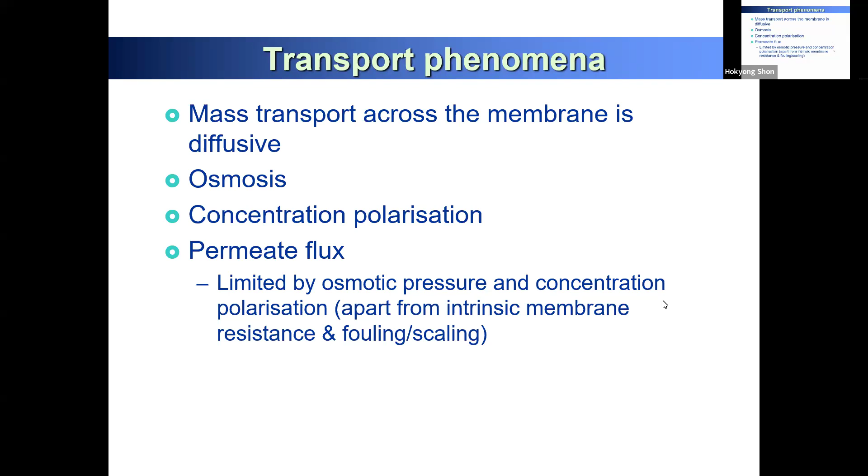Okay, so now it's time to talk a little bit more about osmosis, concentration polarization, and permeate flux, to design our process well. So, osmotic pressure - reverse osmosis, forward osmosis - I already explained the detail.

So we have several examples of osmosis in our body, even in fruits, like a cherry. When you have a very big cherry and you don't pick this fruit, and then it rains, the rainwater will be absorbed by the membrane of your cherry. The water keeps being absorbed, and the cherry will be damaged. That's one example of an osmotic membrane, even in the skin of your fruit. It's like you have this kind of osmotic pressure - this is the cherry membrane.

Even with a coconut - the coconut is a big fruit inside. Water keeps accumulating, passing through into the water inside the coconut, and you have a different taste, a little bit sweet, continuously. So water even accumulates from inside to outside through the membrane.

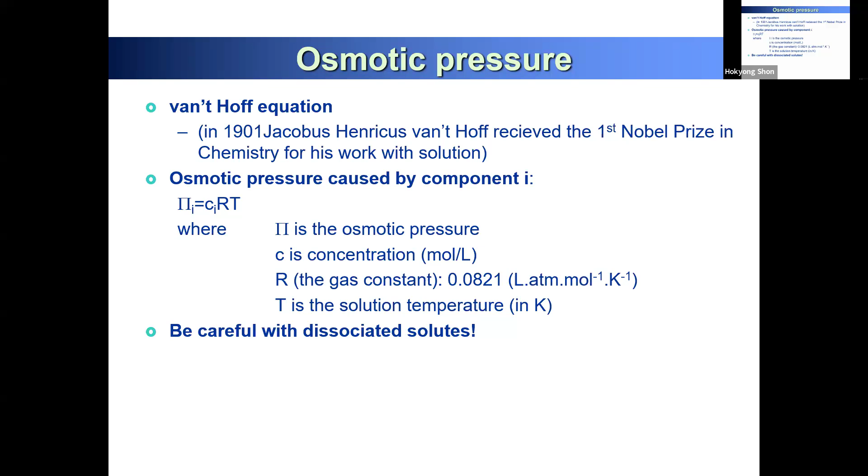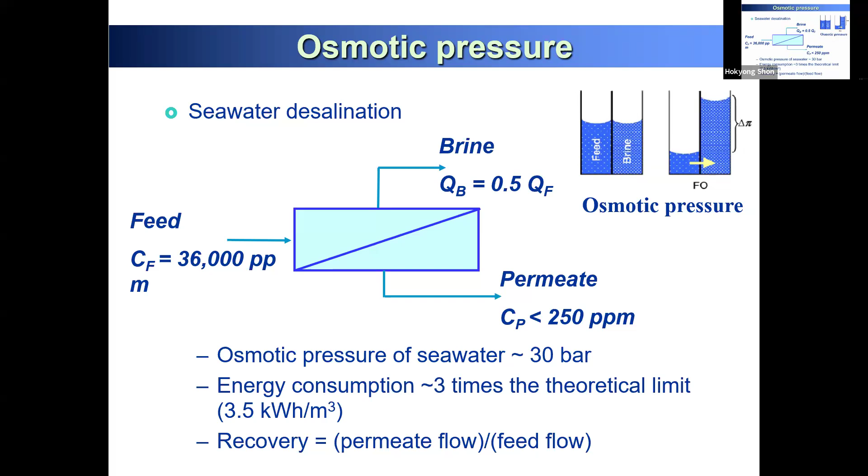Concentration polarization is another important concept. What happens is the water is flowing, then concentration continuously increases on the feed water side, because the water is being desalinated.

Concentration continuously accumulates, and you have more polarization impact due to high pressure. You get a higher concentration on the membrane surface rather than in the bulk channel flow. So your concentration on the membrane surface differs from the concentration in the channel.

The osmotic pressure changes at the top because you keep pressurizing at 70 bar, and ions keep trying to pass through the membrane as water keeps passing through. So they keep accumulating on the membrane surface. Real osmotic pressure differs between bulk solution, membrane surface, and membrane permeate.

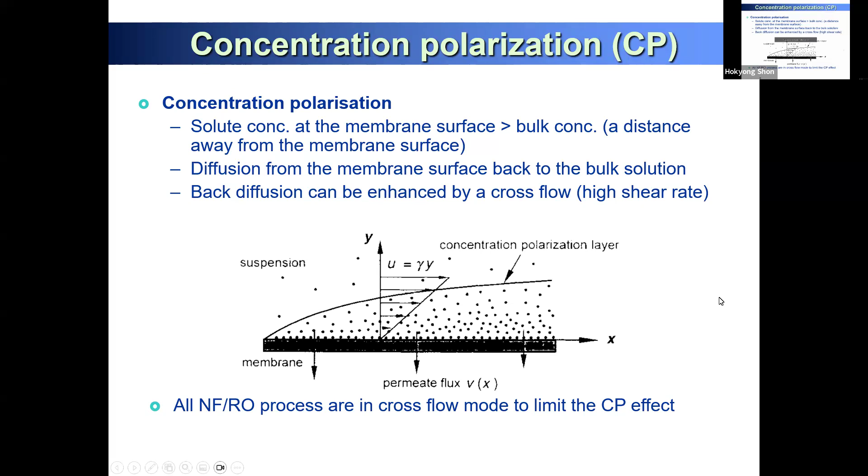So what's the element? You can design the element - this is a 40-40 element. We just say 40-40. 40-40 means 40 inch - 40 inch means 1 meter, this is 1 meter, 40 inch. And 4 inch is 10 centimeters of diameter. So 40-40 means 1 meter, 10 centimeter diameter is the one element you can install.

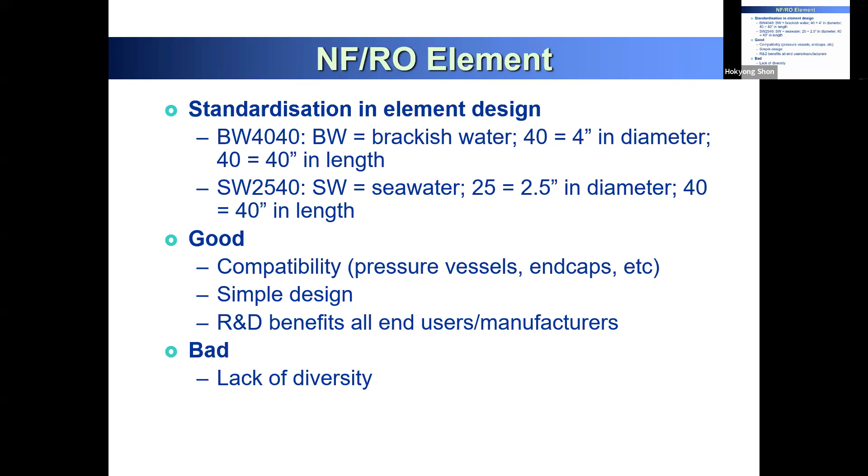Now let's see how this element is manufactured. If you see this manufacturing process, you will have a better idea how we can connect this one as a membrane element.

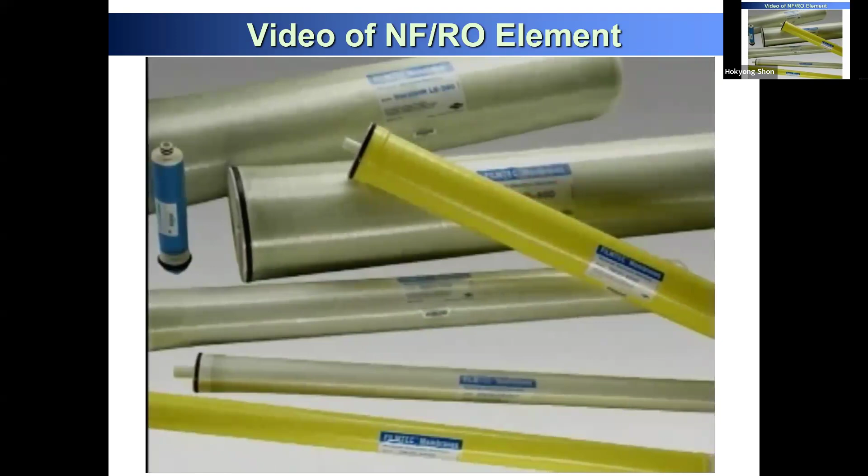FilmTec Corporation, a subsidiary of the Dow Chemical Company, is the world's leading manufacturer of reverse osmosis and nanofiltration membranes. Our products are used in a wide variety of industrial, municipal, residential, and commercial applications, helping Dow achieve its mission of improving what is most important in life - the human element.

Our cutting-edge manufacturing technology improves the performance and quality of our membranes and provides the scale and infrastructure to serve the rapidly growing demand for RO and NF membranes. Providing high-quality membrane products starts with quality raw materials from ISO-certified suppliers.

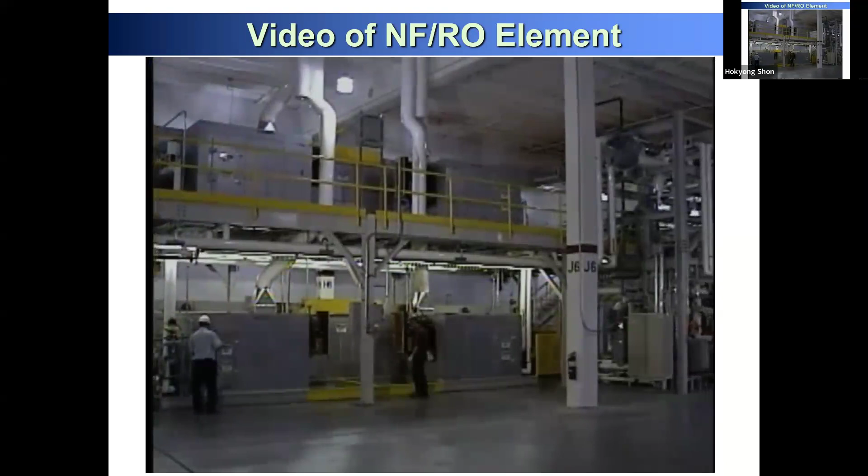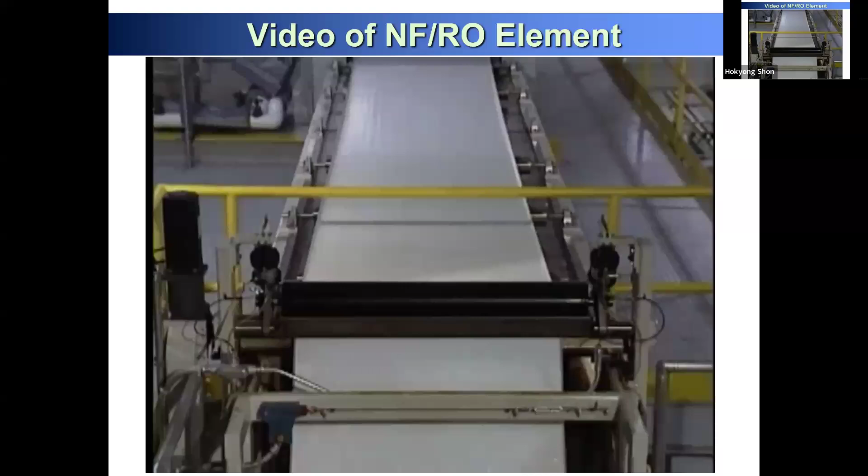FT30 thin-film composite membrane, invented by FilmTec nearly 3 decades ago, is the genesis of today's industry standard. With each new generation of manufacturing equipment, the quality of FilmTec membranes is continuously improved through advanced process automation and control, from handling polyester-based material through casting the microporous polysulfone support to the complex polymerization reaction that creates the polyamide membrane layer. Design innovations allow us to use advanced membrane recipes that improve membrane performance and consistency.

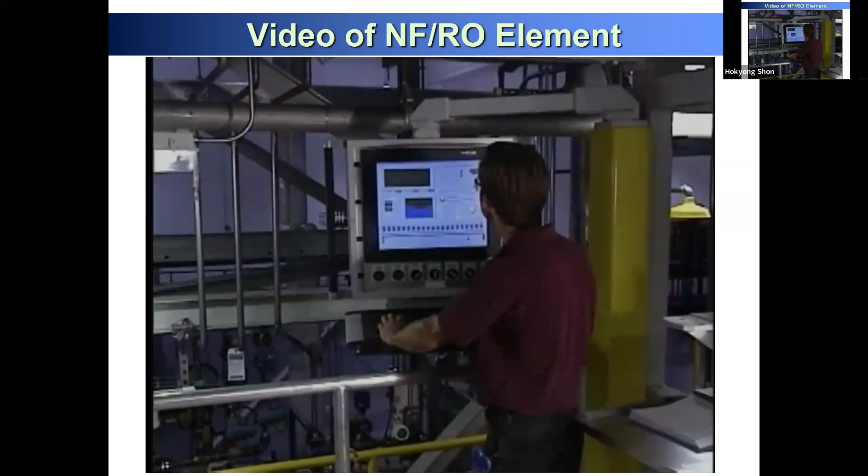Dozens of critical variables are controlled and inline quality checks are performed to produce consistent, defect-free membrane without patching, giving FilmTec membrane the widest pH cleaning range in the industry.

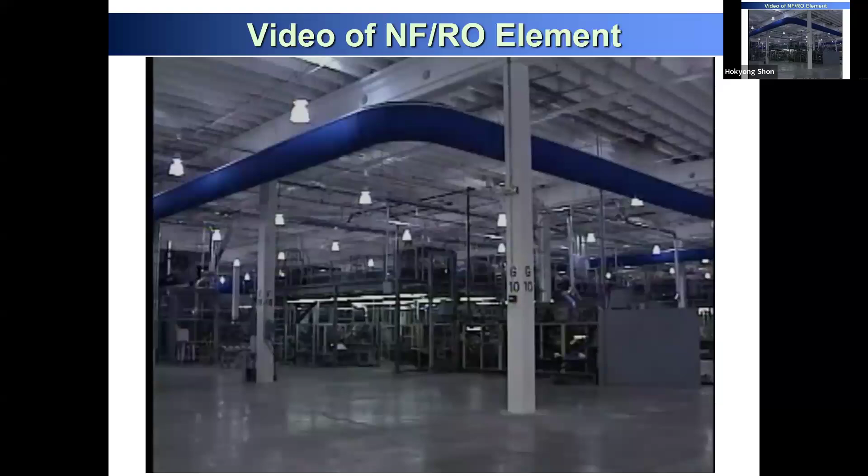A spiral wound membrane element can be fabricated manually or automatically. Dow uses custom-designed precision rolling equipment to automatically fabricate FilmTec elements because it allows for better, more consistent element performance.

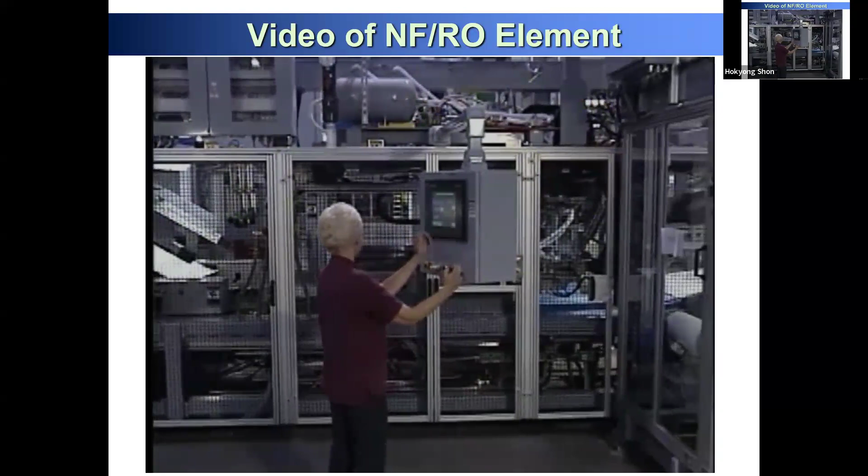Sophisticated robotics for leaf construction and assembly ensure that every element is precisely built without membrane damage that often occurs during manual handling. Automation enables construction of shorter leaves compared to manual rolling, resulting in a more efficient product that is less prone to fouling.

Precise computer-controlled glue lines ensure the highest active area in the industry with guaranteed accuracy and minimize leaks, which can result in poor permeate quality.

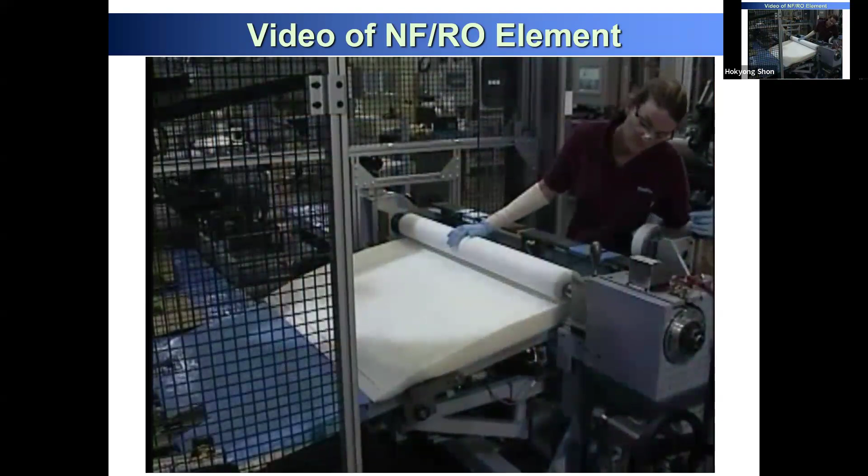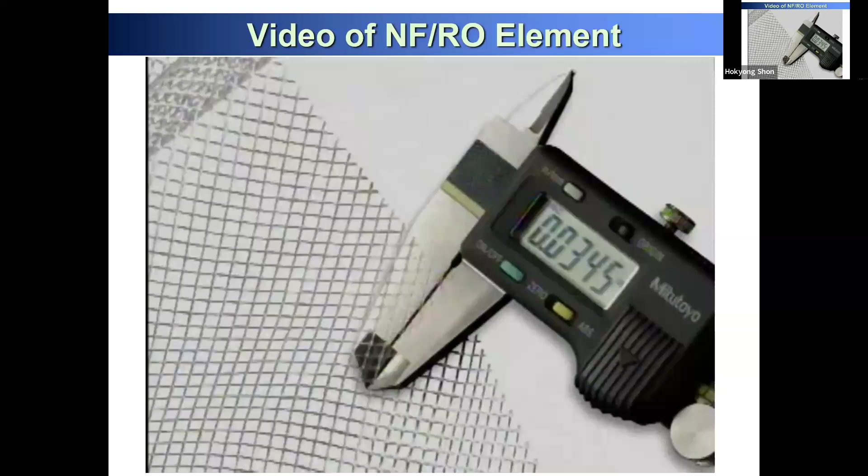FilmTec elements are optimized to have the highest active area combined with the thickest feed spacer in the industry, offering several operating benefits, including improved cleanability, lower pressure drop, increased durability, and the ability to handle more challenging feed waters.

A unique barcode allows continuous tracking of each element. Online quality checks for scroll integrity and dimensions, and an inline vacuum test, are performed on every element to ensure mechanical integrity.

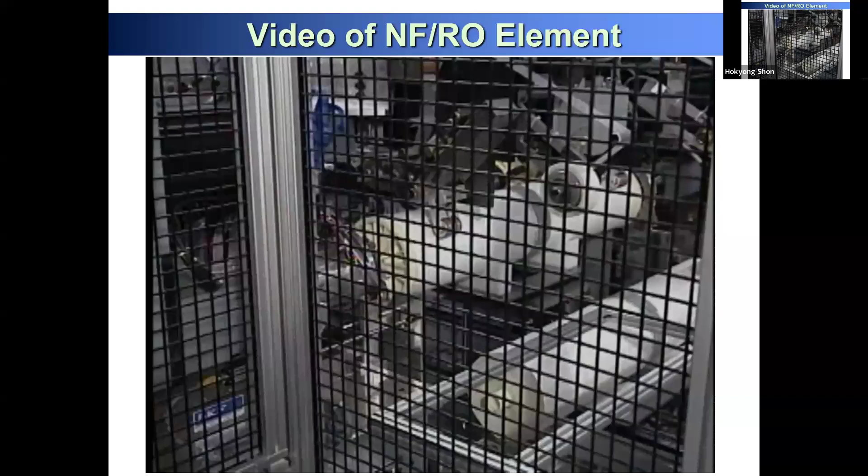Any elements failing preset measurements are discarded. End caps are welded to the product water tube in a process that improves element strength, and a quality test ensures weld integrity.

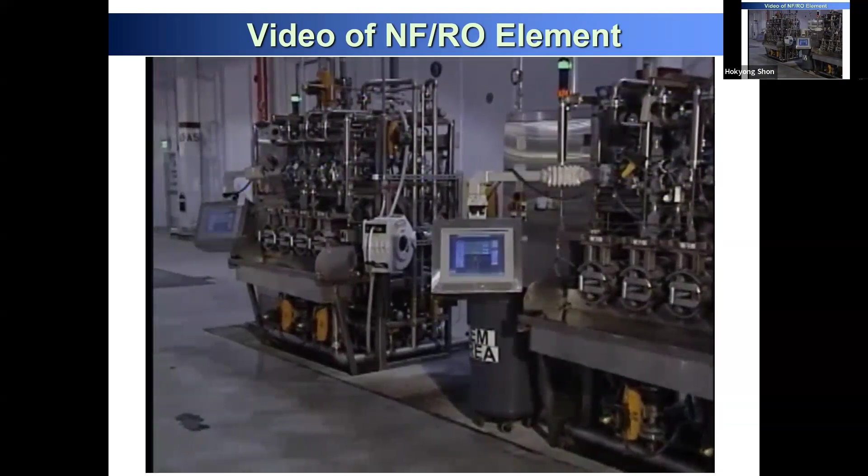Our automated fiberglass process ensures exact and uniform fiberglass application within controlled dimensional tolerances. To validate final element performance, FilmTec uses both a traditional 20-minute performance test and a groundbreaking pulse integrity test, which has the unique ability to detect and diagnose mechanical defects.

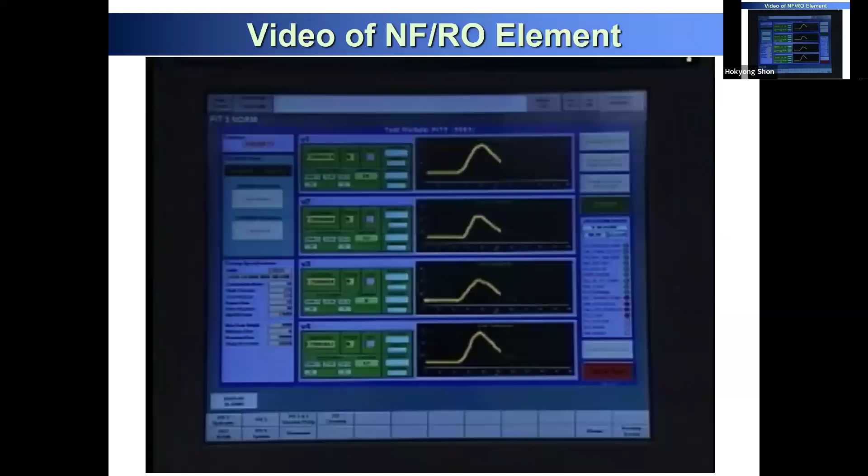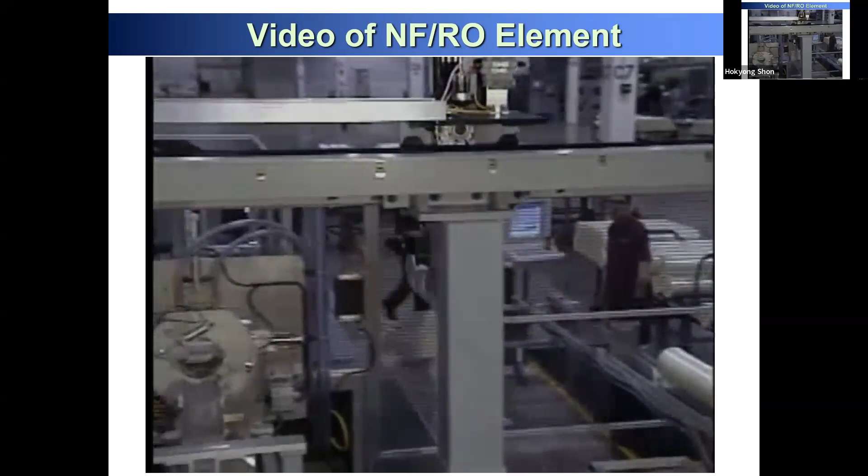Tests are computer controlled, and elements not meeting defined test ranges are discarded. Custom designed packaging equipment combined with precision injected preservative ensure protection for elements during storage and transportation and easy handling.

Prior to shipment, product for each customer order is scanned for traceability and to validate all previous quality checks. Quality is built into every FilmTec element, from the management of raw materials to final shipment. Every element undergoes multiple inline quality measurements, and additional parameters are measured based on defined sampling plans.

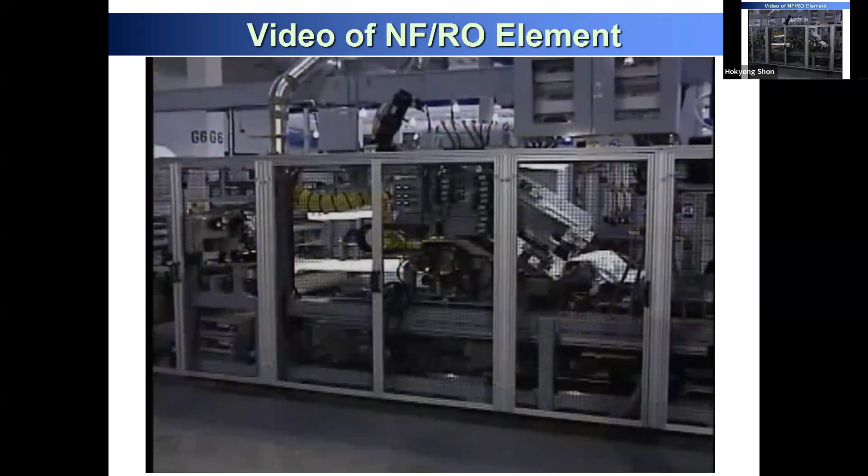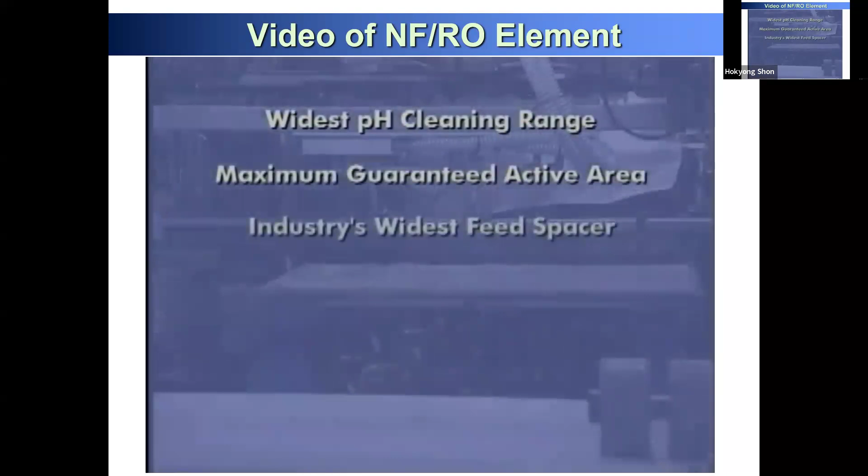Our technology enables a robust, consistent, defect-free membrane with the industry's widest pH cleaning range. Automated precision fabrication enables elements with maximum guaranteed active area, the industry's widest feed spacer, shorter membrane leaves, consistent high-integrity construction, and ILEC interlocking end caps. Collectively, these features enable consistent, reliable performance of RO systems with reduced system capital and operating costs.

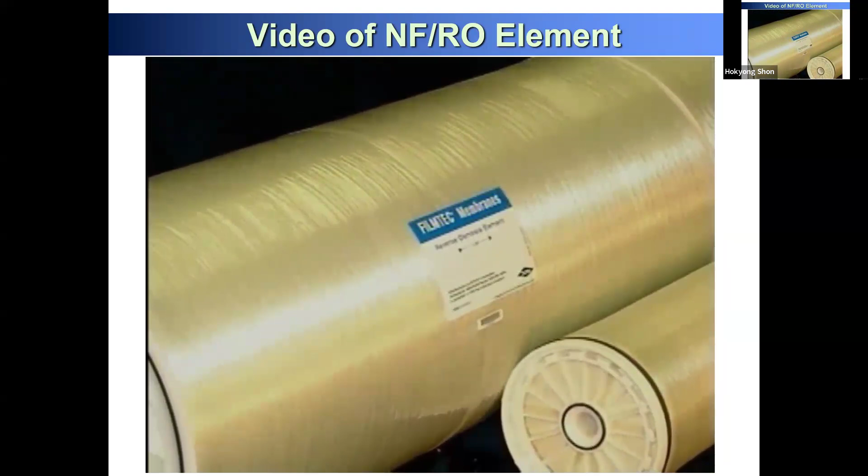With the infrastructure to meet the rapidly growing demands of the market and the technology framework for integrating future innovations, Dow continues to lead the industry in reverse osmosis performance and value enhancement. Our goal is to offer the best membranes to enable the highest quality water at the lowest total cost. Innovation, automation, quality, FilmTec.

So usually they automate it. In fact, they don't really produce by people. This is the little bit reduced size, so they have a 10 centimeter diameter and 1 meter. It's a very typical size of seawater desalination. Then they put the membrane spacer, backspacer, then continuously roll, then maximize the membrane surface area.

Also, the pressure is very high, like 70 bar. So if you don't have a very compact design, this module will burst easily. Also, the membrane can be easily damaged. So they generate this kind of spiral wound module design and then produce a good quality membrane system.

So that's how we create one element. It's $500. People just buy one element and it can produce a lot of water.

So this is the pressure vessel. You can see the element is this one inside. You're putting the element, one element, so you have a connector, then your pure water is coming out from here. And you connect again, 2 elements, 3 elements, 4 elements, 6 elements, 7 elements.

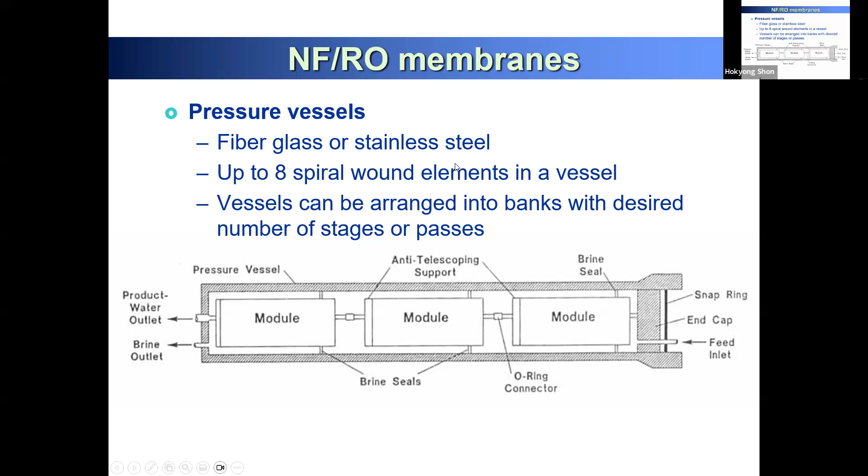So you need to pressurize to 70 bar, so you need a very strong pressure vessel. Inside you have the element, outside the pressure vessel, which can tolerate 70, 80, 100 bar pressure of your membrane. So the pressure vessel requires this kind of strong material, like fiberglass or stainless steel, to tolerate the overall high pressure.

So you can design how many pressure vessels we need, how many elements we need. That's another question for your assignment. The pressure vessel, we need one pressure vessel, and we can include 7. It's typically 6, 7, or 8 elements. So you can design seawater for your assignment, maybe seven elements in one pressure vessel, which will give a good design.

And this pressure vessel typically has a different flux distribution, pressure distribution. So you have your feed water, seawater coming through this way, and then continue to increase your feed water concentration of salt, and pressure is different from the initial stage and last stage. Also, your flux accordingly will change at the initial element.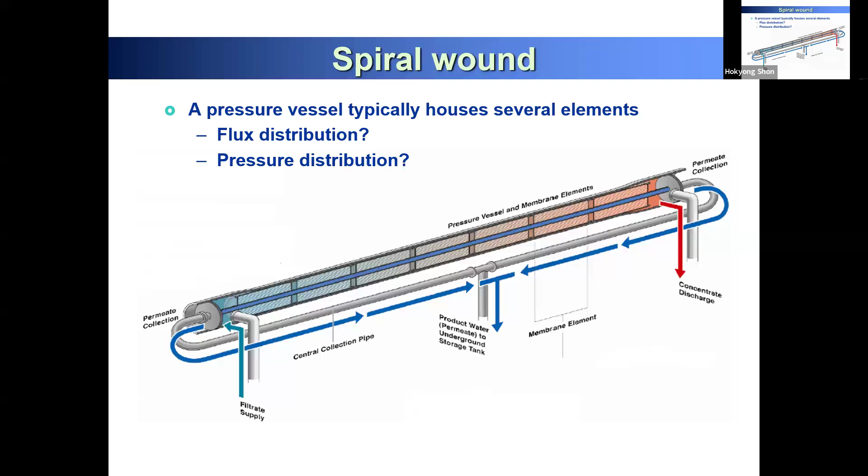So they have a lot of flux at the beginning; at the last, they have less flux. So this is the flux distribution, pressure distribution. You need to also calculate this as a whole pressure vessel design rather than one single element of your membrane flux and feed water. So we need to consider this.

Also, consider concentration for the salinity in the permeate. So first element, last element, 8 elements - your permeate is 150 milligrams per liter. At the last one it's almost 450. So they are increasing a lot.

So you have to look at also the overall concentration change from element 1, 2, 3, 4, 5, 6 - they combine together and then mix. So you have to see carefully also the pressure, permeate flux fraction.

So you can see 25% higher water flux, and 10% at element 5, and at the last element this is 5%. This will give a better way to understand your water flux. So you have to also look at how different elements, even though in one pressure vessel, have different water flux. So you have to calculate each element, how they behave.

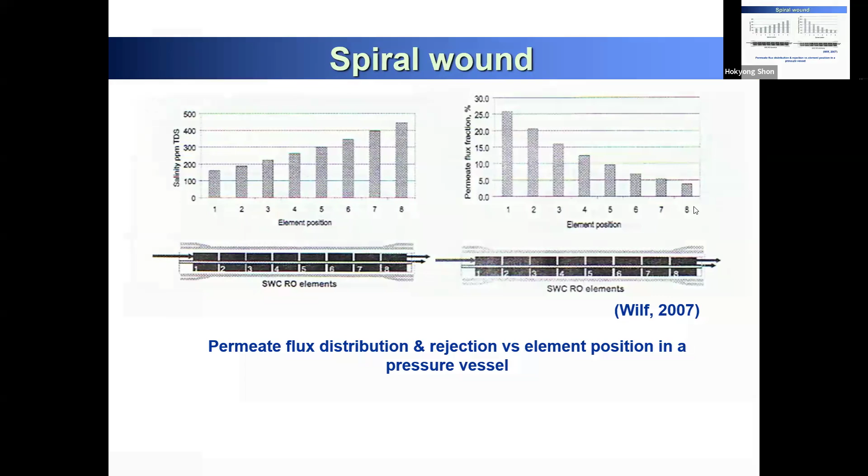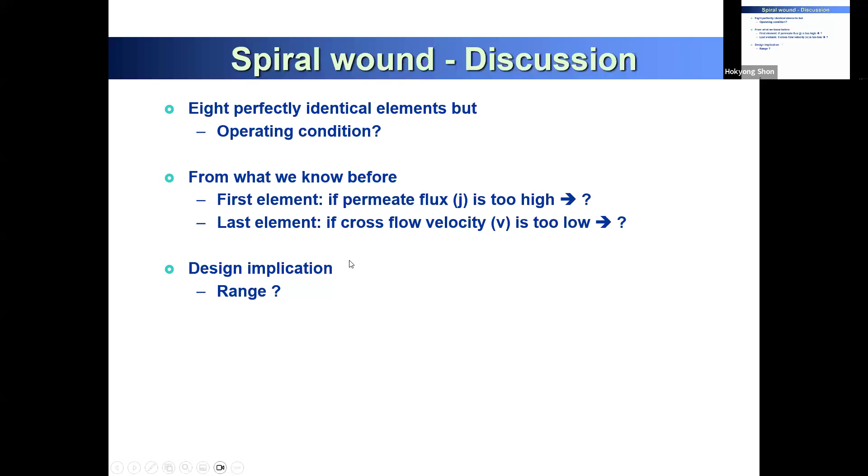So that's the overall design and spiral wound operating condition from what we know. And first element, last element, design implication range - you have to see carefully. This is the spiral wound behavior of the stage: pressure profile, so you have first, second, third stage - first pressure vessel, second pressure vessel, third pressure vessel.

Then this is the second stage, and you have a different concentration polarization. When water passes through the first stage, it's mixed again, and the salt concentration becomes consistent. Then it enters the second stage, and you have another concentration polarization, mixing again before the next stage.

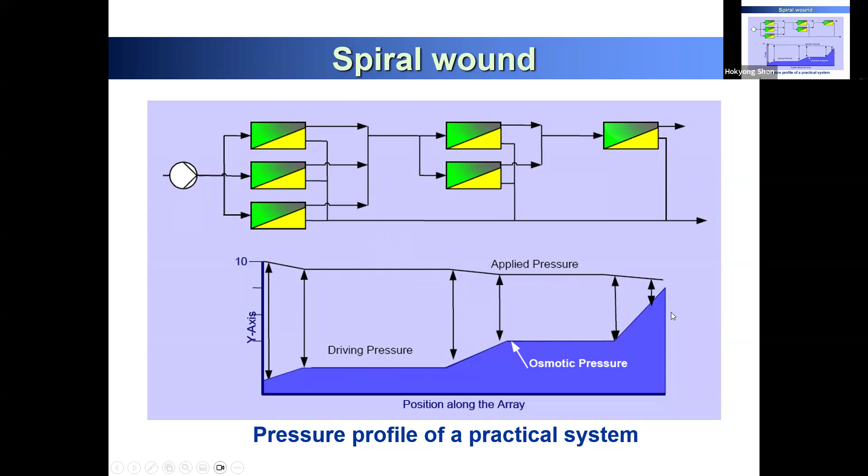So the osmotic pressure driving force and applied pressure are continuously changing. It's not that you have just one high pressure pump - every stage, every element will change the pressure little by little. So how can we make sure we account for this pressure change, osmotic pressure change, and calculate everything needed for the design? This is the pressure pump.

Sometimes you can add a boost pump. If you apply 70 bar pressure at the first stage, and you want the second stage to have the same 70 bar pressure, you need this because there's a pressure drop - your pressure decreases, but you want to maintain the same pressure as the initial stage, or even increase it. So you can have a boost pump at the second and third stage to control each stage and maintain consistent pressure, avoiding any pressure drop at the last stage.

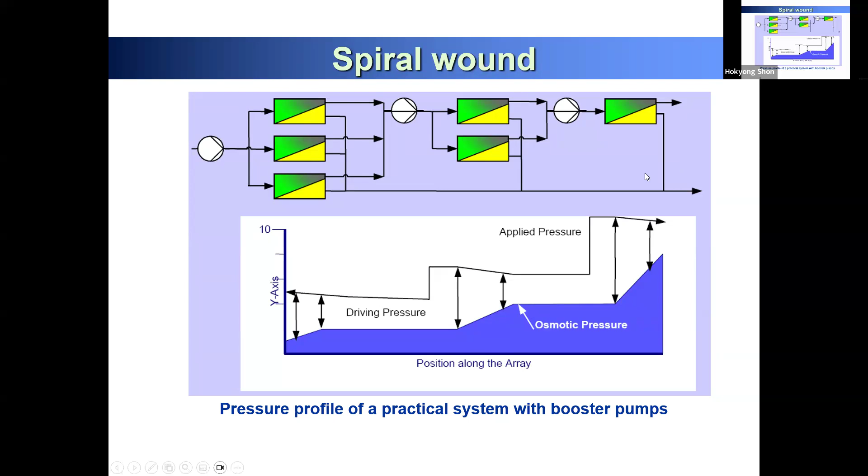So looking at stage 1, 2, 3, the flow rate decreases this way, and the flux continuously decreases because feed water concentration polarization causes the TDS and osmotic pressure to increase. So your flux continuously decreases while the feed side concentration continuously increases. So you get different behavior - even with the same element and same pressure, depending on how you progress, you'll have different behavior of feed flow rate, feed side concentration, water flow, and water pressure.

So how can we calculate this in detail? It's very challenging, right? Each element, each pressure vessel, each concentration polarization, each flow rate. Flow rate is also one of the most frequent errors in your design. If you don't give enough flow rate, at the last stage you won't have enough water, and you'll get an error message in your simulation software. So flow rate has to be managed very well.

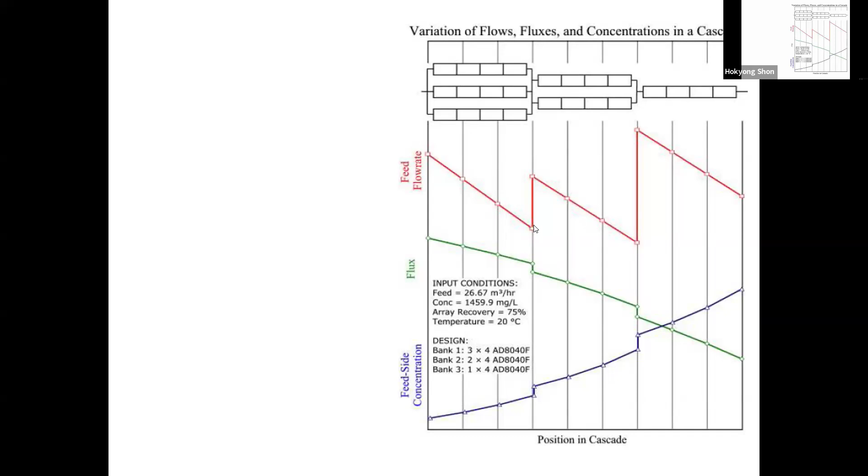At the same time, your permeate flow needs very good design, and pressure has to be applied carefully. That's why your design needs to have no errors rather than just owning the design. Luckily, whenever you get a report in the software, it can tell you your flow rate is too high or too low, so you can go back and adjust it a little. Also, if you have too much high concentration of feed water at the last stage, you have to change your recovery - how much you recover - and think carefully about the design.

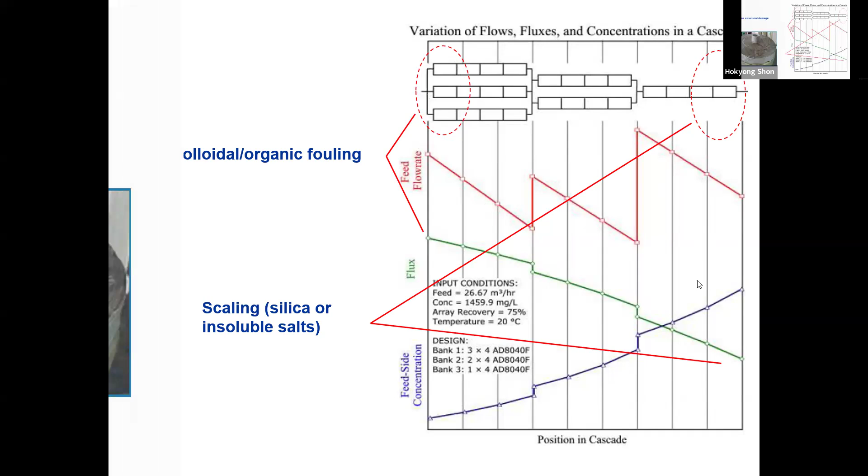Also, when you operate for a long time, you mostly get colloidal organic fouling at the beginning stage, and scaling at the last stage. This is the spiral membrane. Excessive differential pressure can cause structural damage and membrane telescoping - because the pressure is too high, you get this membrane telescoping phenomenon. In this case, we have to replace the membrane.

And this is the design - how we can make a good design of our overall process. So let's look at more specific design terms.

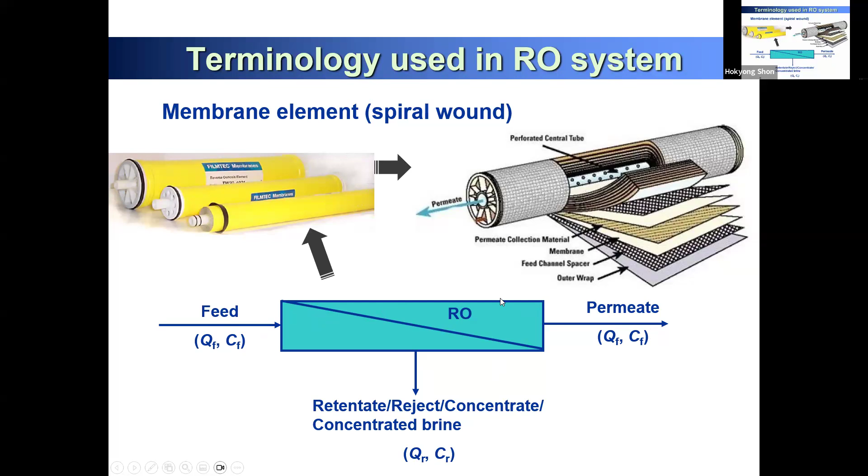So on the feed side, you have the flow rate Q, quantity, and concentration. You have the retentate, reject, concentrate - the brine is here, so how much is coming out? And the permeate is QP, CP. So we have a very simple way of looking at feed, permeate, and reject. This gives us a membrane element, and we can have some recirculation in the process.

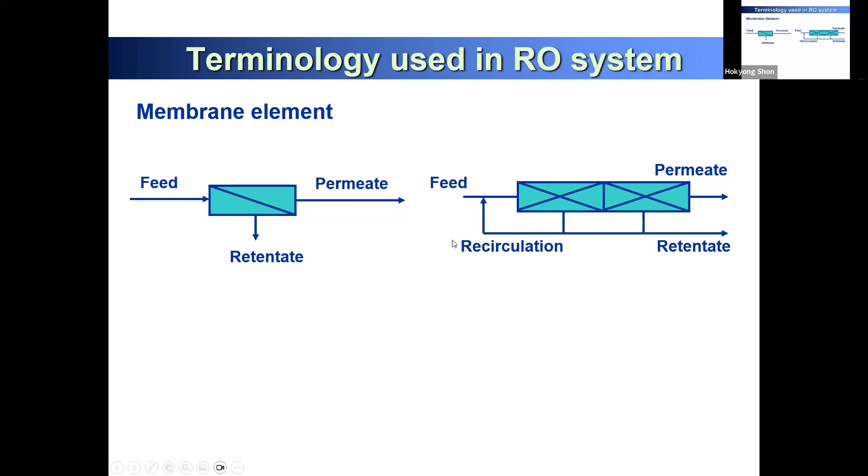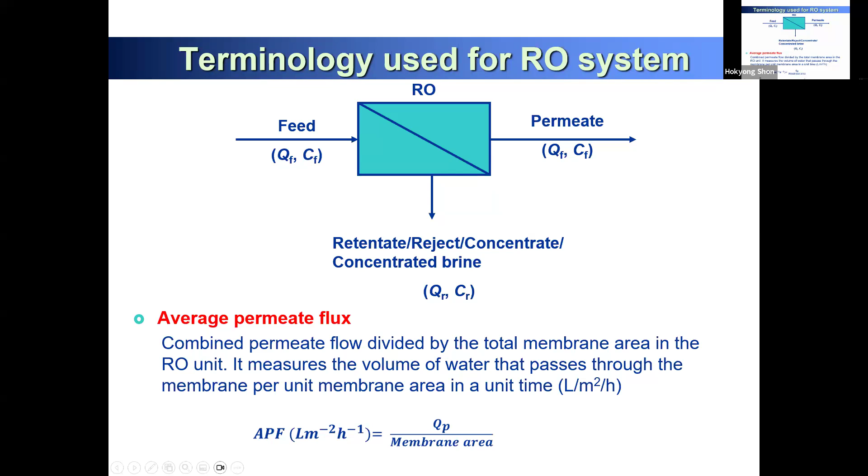And this is how average permeate flux can be calculated. As feed passes through, the average permeate flux is in terms of LMH - QP, how much permeate is produced per membrane area per hour. So in one hour, how much water passes through your element, divided by the membrane area.

So this is the salt passage - the feed goes in, and some salt passes through. How much salt is passed through? Because our membrane is not perfect - you already saw this in the video, some defects exist in our membrane, and these defects allow salt to pass through. So some salt concentration still passes through. Salt passage is calculated as CP over CF times 100, which tells you how much rejection is achieved by your membrane.

Each membrane is different because some feeds have too high salt content, so you need a very high salt rejection membrane. For wastewater reuse, there's not much salt, so you can use a lower rejection reverse osmosis membrane. Even RO membranes are not all the same - they have loose RO, tight RO, compact RO, high rejection RO, and high flux RO. A larger pore gives more flux, while a small pore gives high rejection but low flux.

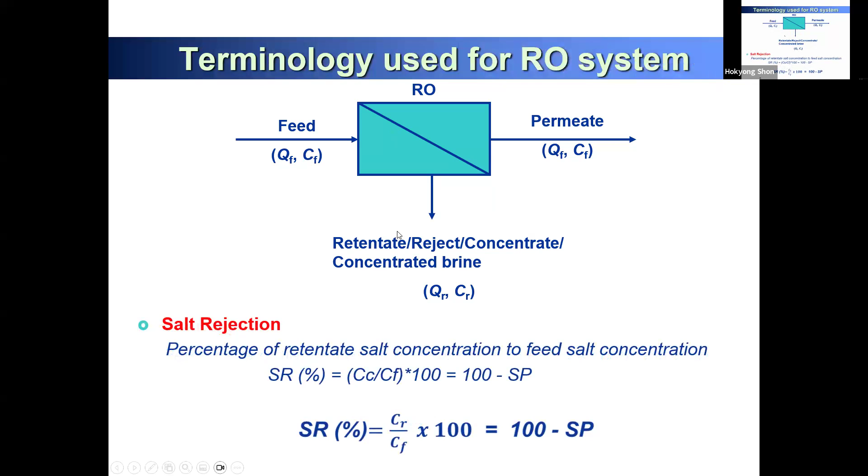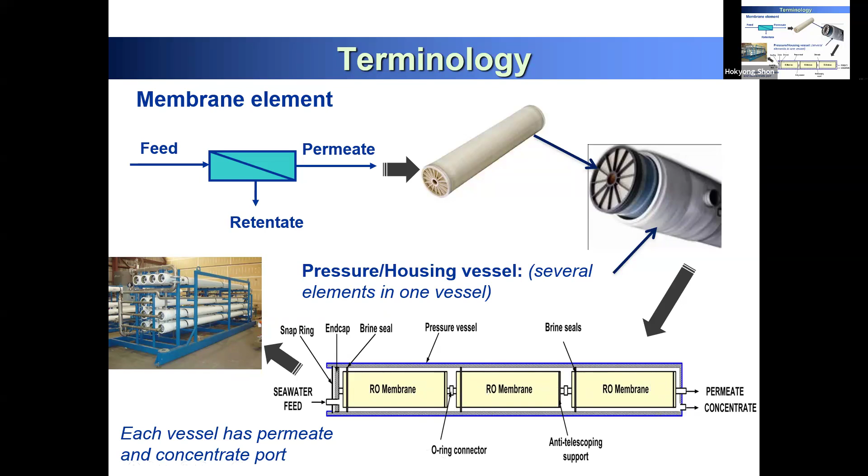So, salt rejection - this is the recovery rate, QP over QF times 100, giving 50% recovery. We have a membrane element with a pressure housing and pressure vessel. Each element can be connected with an O-ring, giving a permeate side and a concentrate side, so you get both channels continuously combining.

Let's practice, because if you just use software you won't understand what recovery is actually happening inside. One pressure vessel has 7 elements, each 1 meter, so 7 elements means 7 meters in one pressure vessel. Let's see how much recovery we can get from each element.

Our target for this desalination is 40% - we want to achieve 40% final water recovery. Feed side flow rate is 8 cubic meters per hour. Passing through the first element, we get 1 cubic meter per hour of permeate, and the concentrate brine is 7. So 1 divided by 8... for one element, that's 12.5% recovery.

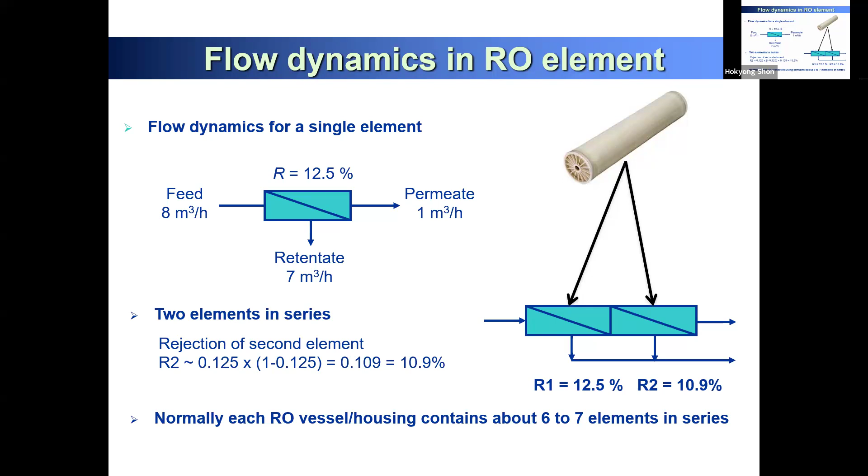This gets more complicated when you design a second stage. This first stage is only one pressure vessel, but that's not enough to achieve 40% recovery. So you need to connect another pressure vessel behind it, and calculate 40% at the end of your permeate. This means 40% is not achievable with just one pressure vessel of 7 elements - you connect another pressure vessel, and the recovery rate keeps decreasing until finally you achieve the target. Because of concentration polarization in seawater, you cannot achieve 40-45% recovery in one pressure vessel. So you have to calculate first stage, second stage, and each element's recovery will be different. That's how you have to think about your overall recovery rate.

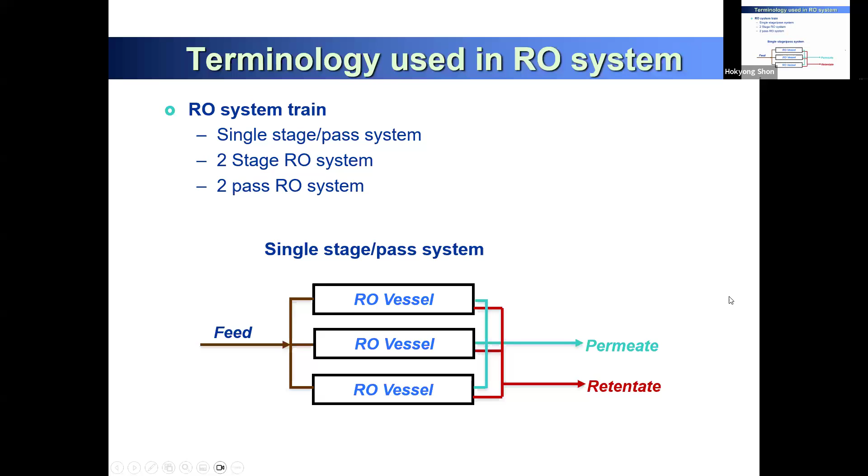Let's see the detailed concept of stage. So first stage: we have four different pressure vessels.

Then in second stage, the retentate, the brine, is moving to the second stage to achieve a higher recovery rate, and you can get 40 to 45% recovery. If you go to stage 3, you can achieve even higher recovery, 50%, but it's not an effective way of design.

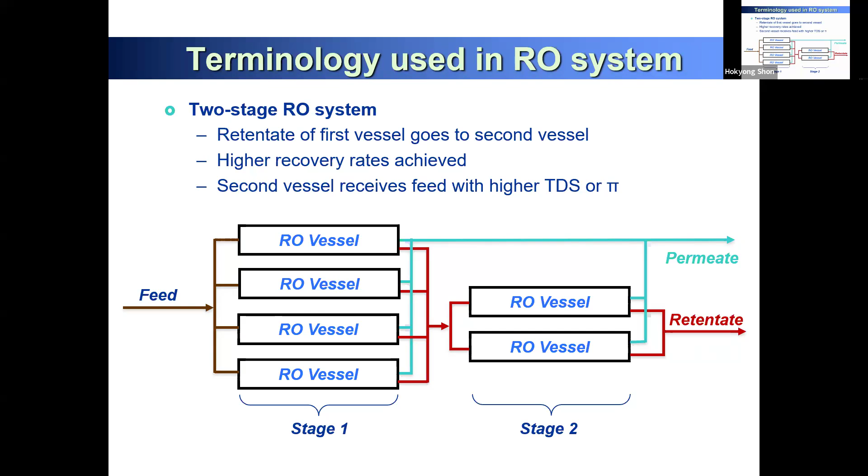So for seawater desalination, we just go for first and second stage, and you have a better idea to get your final recovery ratio. So the stage configuration can impact your overall recovery ratio. Here's an example.

Let's say your feed water is 1,100 milligram per liter, and flow rate is 840 cubic meter per hour. This water is passing through your first stage.

Then in the next step, second stage, you further increase your permeate total dissolved solid to 60 milligram per liter, and flow rate is a little bit less. In the third stage, because your feed water concentrate increases, it goes to 240 and 51 cubic meter per hour.

So we get the final concentrate at 7,460 milligram per liter and 125, which means the recovery is 85%. So passing through first stage, second stage, third stage, you achieve 85% recovery.

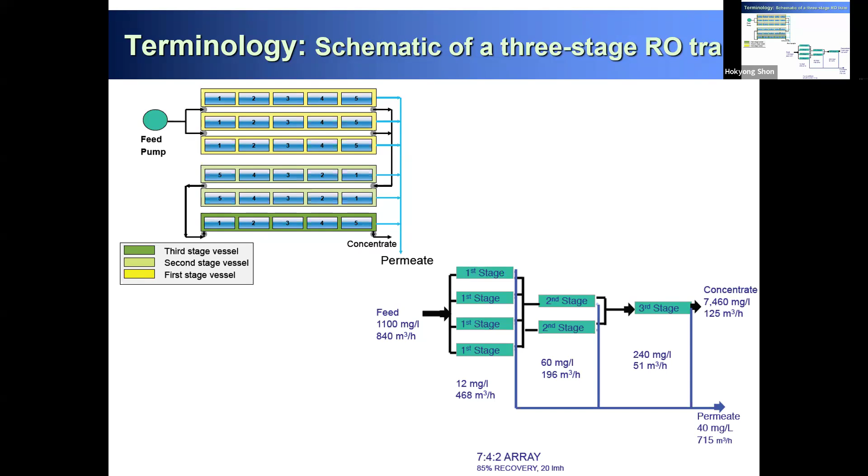So we just say a 7:4:2 array. When you increase your overall water recovery, you have to continue with something like a 7:2 ratio, or 4:2 ratio, or 6:3 ratio. So you have to also design your desalination system with a different array configuration. Your array design can impact the recovery.

Also, you have a second pass and a first pass. One of the assignment questions is about how to achieve boron concentration less than 0.3 milligram per liter. When you design with only a first pass, this is not good enough to achieve the 0.3 milligram per liter boron target.

So you can pass the permeate through another array to increase your overall rejection of salt. As I mentioned, the RO membrane is not perfect, so there are many defects - some ions will pass through, or some ions pass through very easily. So you go through another barrier as a second pass, which increases the overall quality of your water. So you have a better way of design with the second pass, and you have to utilize this second pass design to achieve boron concentration less than 0.3 milligram per liter.

Energy - I already mentioned about energy. Energy is the biggest problem for water desalination, right? So how is energy distributed? You can get more idea about how we can save on this energy consumption of water desalination.

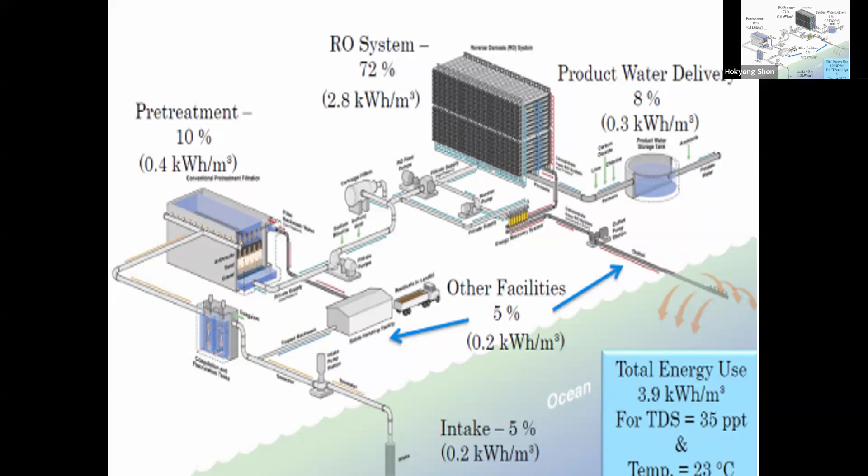So let's see energy calculation for RO pump. Mostly energy consumption is from the high pressure pump. This high pressure pump is very much required for the overall energy.

So seawater flow rate, for example, 100 cubic meters per hour. Applied pressure, we need 75 bar pressure. Reverse osmosis recovery, let's say 40%. Then permeate flow is 40.

Let's see how we calculate the overall energy consumption. This is pilot real data for your calculation of specific energy. You operate this system, you need 300 kilowatt hour energy consumption, and you produce 40 cubic meter per hour. So we get 7.5 kilowatt hour per cubic meter.

So when you utilize energy recovery, what's energy recovery? You pressurize to 75 bar, and at the end of your process, if you don't recover the energy, it's all wasted. So this pressure can be exchanged. If you use a turbine for energy recovery, you can save 30 to 40%, down to 4.4 kilowatt hour. With a pressure exchanger, 140 kilowatt hour. So you have 3.5 kilowatt hour per cubic meter when you use energy recovery.

You can convert this overall energy consumption and get this final data: 7.29 kilowatt hour per cubic meter. So your pump energy consumption can also be theoretically calculated. The high pressure pump requires a lot of energy.

So how much do you pay for 1 kilowatt hour? When you produce 100 cubic meters per hour at pressure, you need power consumption of 300 kilowatt hour. So what's the 1 kilowatt hour energy price? How much do you pay for your energy bill every year? A lot of people are worried about energy bills, right?

Energy costs in your home. You don't worry about the energy bill? You don't care about the energy bill? You don't pay? I don't think my bill is included. Okay, you're right, it's included. Who pays for energy? You pay. How much do you pay?

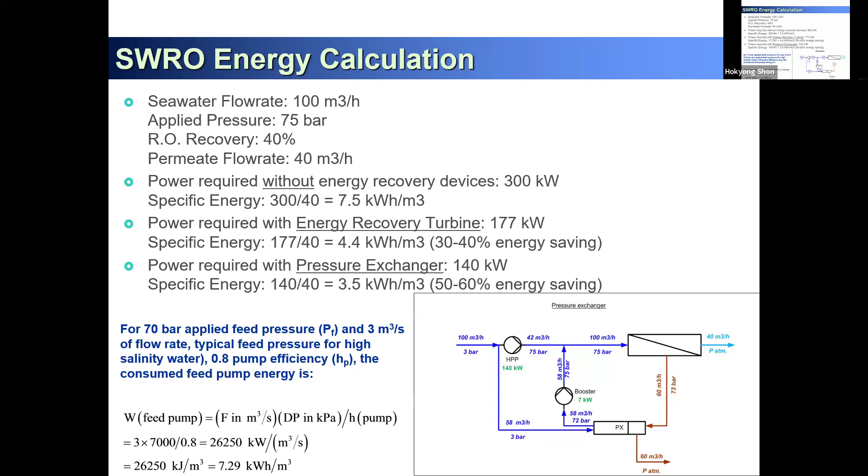What I like to do is, she pays $400, okay, to cover this every 3 months, so she pays around $133 per month. Let's say 1 month is roughly 30 days. So every day you pay $4.5. So what's the energy consumption?

How much do you pay for, let's say, how much for 1 kilowatt hour in Sydney? Compare electricity. Let's put it into Google. In fact, it's 27 cents, maybe some council discounted rate, maybe public facility, up to 47%, maybe some others. Let's say average.

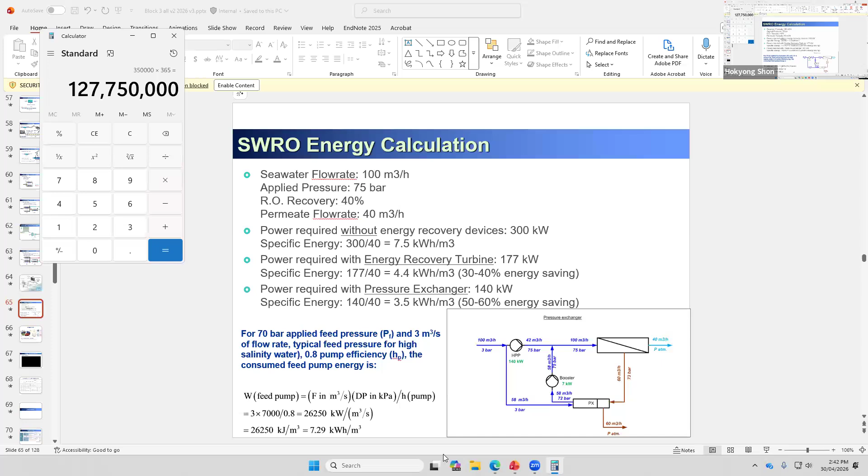So we have to make sure how to reduce the overall energy cost, which will be a very big saving we can achieve. So this is the general calculation we have tried now.

So this 1 kilowatt, 0.35 dollars, can turn on your light bulb for almost 10 hours. And this is 10 light bulbs you can just turn on, like almost the whole building's lights, with 1 kilowatt we can utilize.

So she's using 1.67 kilowatt per day. So you can see this kind of 1 kilowatt is not really small. It's a very typical way of energy consumption. This 1 kilowatt itself is not that small an energy consumption. You can think about it.

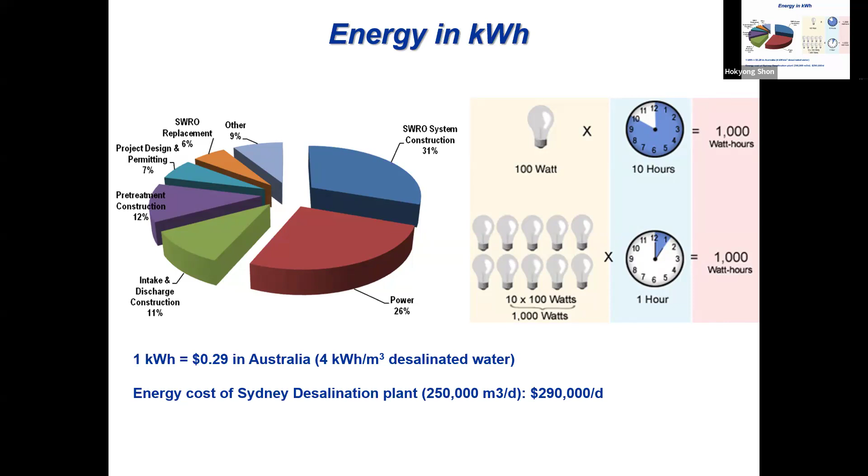So that's the energy. A lot of people are talking about energy crisis, energy issue, energy saving, energy bill, energy supply, oil, natural gas, hydrogen, solar, wind, fuel cell, battery, because they really put a lot of money in this sector.

Also, to save this energy, as we discussed, the pressure exchanger was developed, and we saved more than 60%, 70%, 80% energy consumption per hour. So let's see how this energy recovery saves it, almost every year.

Oops. Oh, this energy.

It's crazy that a planet covered in water is running out of the stuff. That's why this is so important. But what you're looking at here could be one of the most significant engineering breakthroughs you'll see in your lifetime. It's predicted that by 2025, demand for fresh water will exceed supply by more than 50%, leaving a third of the world's population without ready access to fresh water.

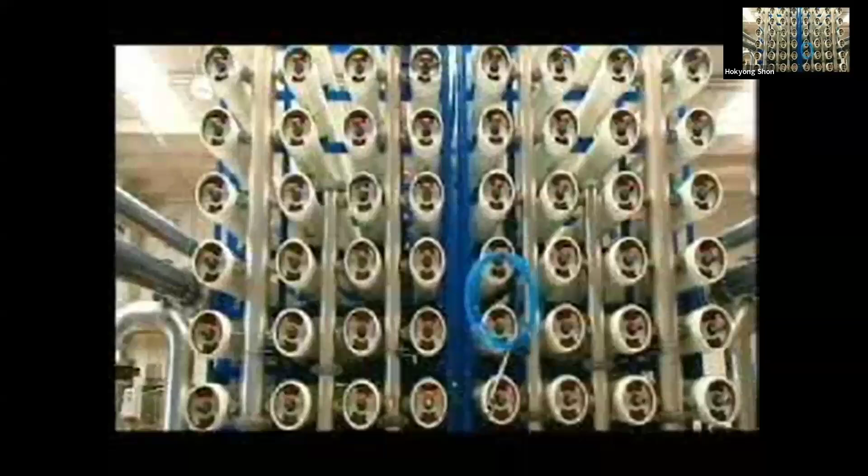But we don't call ourselves the blue planet for nothing. Our vast expanses of sea may well be our saviour. It's a process called reverse osmosis, where huge amounts of energy are needed to pump seawater through fine membranes which filter out all the dissolved salt. But as you're about to see, a simple invention has revolutionised desalination, and those high operating costs are no longer a major problem.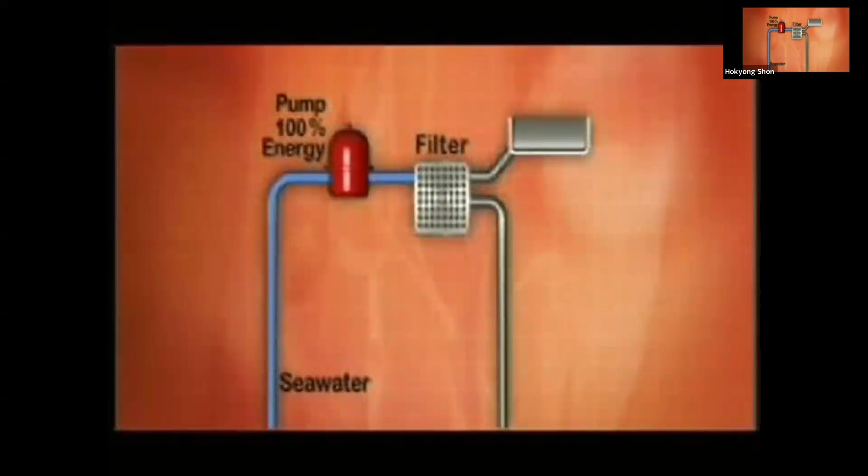While modern desalination plants are far more efficient than they were 20 years ago, they still use a whole lot of energy, most of which is wasted. On average, it takes 3 glasses of seawater to produce just 1 glass of drinking water, but you're still paying for the energy that it takes to process all 3. And that, ladies and gentlemen, has been desalination's Achilles heel. Despite their best efforts, scientists have not been able to radically improve that production ratio of seawater to drinking water.

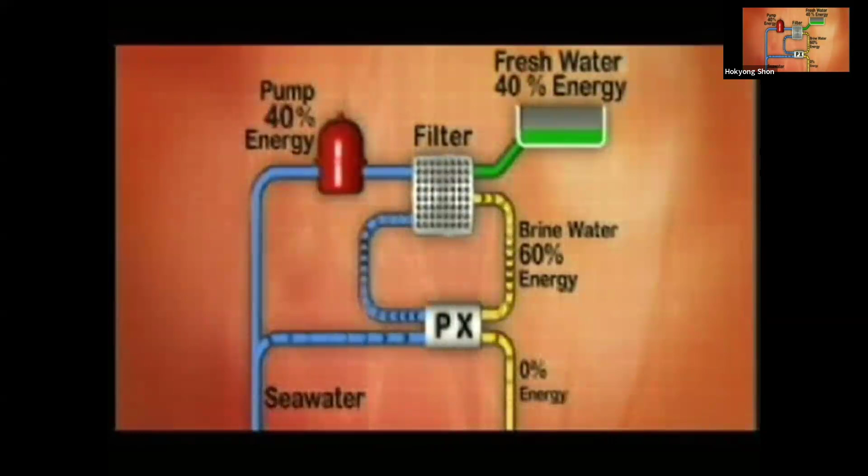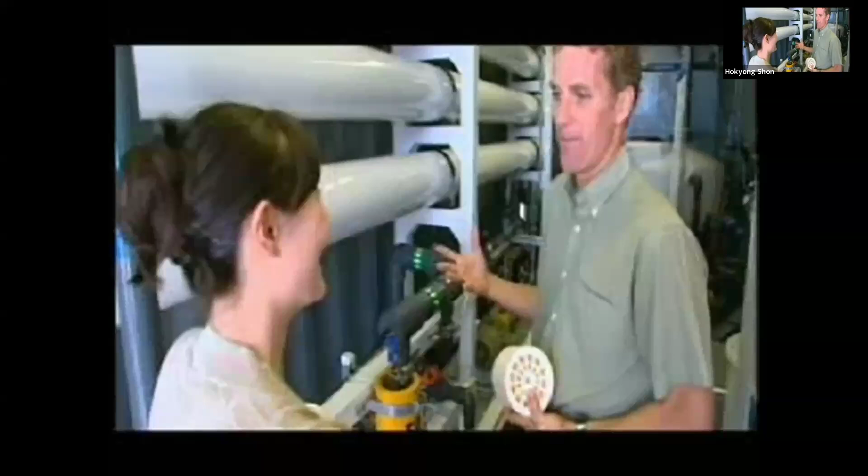So they began investigating ways of harnessing the pressure energy of the reject seawater and using it to help power the whole operation. Californian company Energy Recovery Incorporated finally cracked the problem with a device called the PX pressure exchanger, which cut energy costs by a massive 60%. So what the pressure exchanger does is it recovers the energy in that waste stream at almost 100% efficiency. It operates at 97% efficiency, which in engineering terms is extremely efficient. John McHugh heads up the Affordable Desalination Collaboration, a US Navy joint project with the Bureau of Reclamation.

For more than a year now, they've been testing and evaluating the latest desalination technologies, including the pressure exchanger. With old desalination systems, you used to have to pump 100 gallons a minute to get 40. With the new systems and this pressure exchanger technology, you pump 40 gallons a minute and you get 40 gallons a minute. It's amazing. Yes, it really is that amazing.

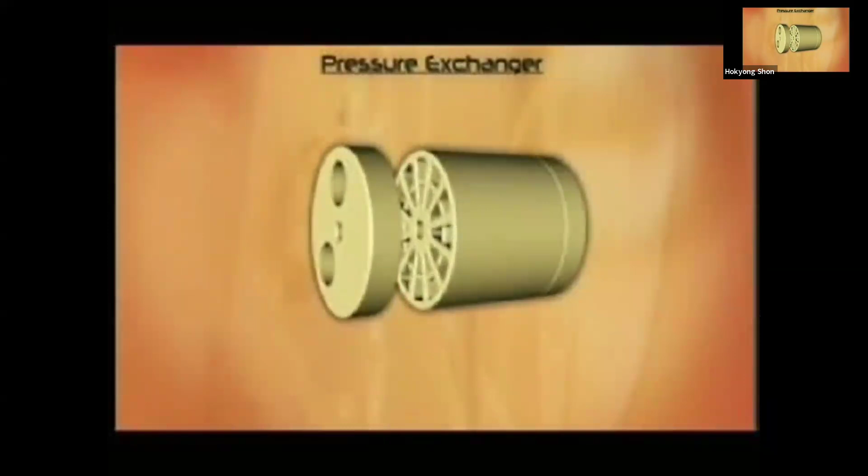Just a ceramic cylinder capped at either end by fixed propeller-like end ducts, all precision fitted inside a tubular housing. The pressure exchanger is effectively cutting running costs by more than half, and that's great news for cities like Los Angeles.

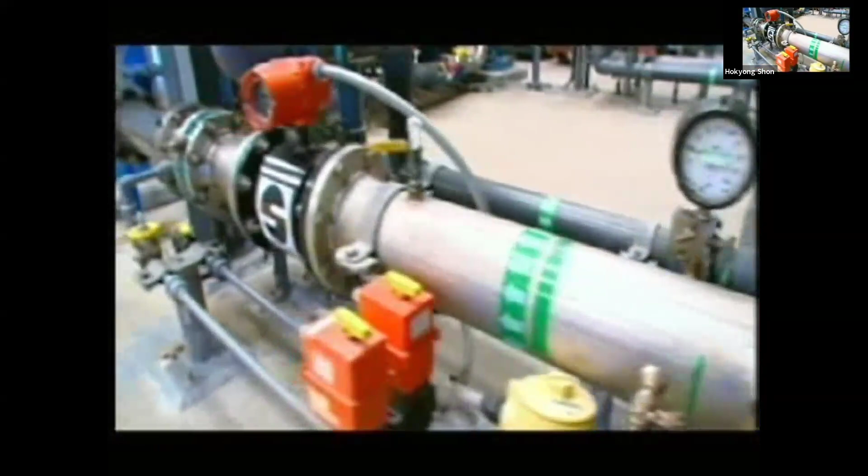So what does this mean for the future of the world's freshwater supplies? Well, in the city of Perth on the west coast of Australia, it means securing the future. It's about to become the first desalination plant using the latest desalination technology, including the energy-saving pressure exchanger. The $350 million desalination plant will be finished in time for summer next year, guaranteeing regular water supplies for the next 30 years. Back where the technology was invented, California, there are 6 new pressure exchange plants in the pipeline.

Every day, the need for fresh water is challenging nature's capacity to produce it. So what you're looking at here could be one of the most significant engineering breakthroughs you'll see in your lifetime.

Do you understand what's how this works? Yeah. Can you explain how this works to me? Yeah. I think this. Yeah, this is the how it works.

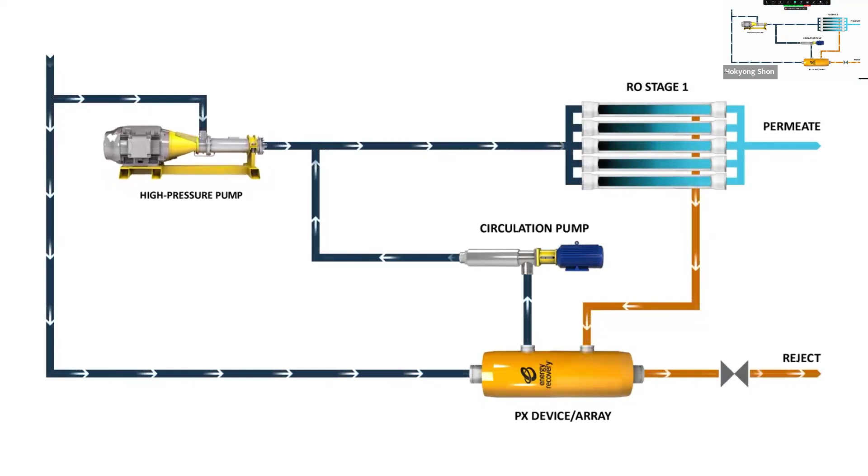PX captures energy that would otherwise be wasted, reducing a membrane-based system's high-pressure pump flow requirements. Not only does it save electricity, it also cuts high-pressure pump size requirements, producing further savings.

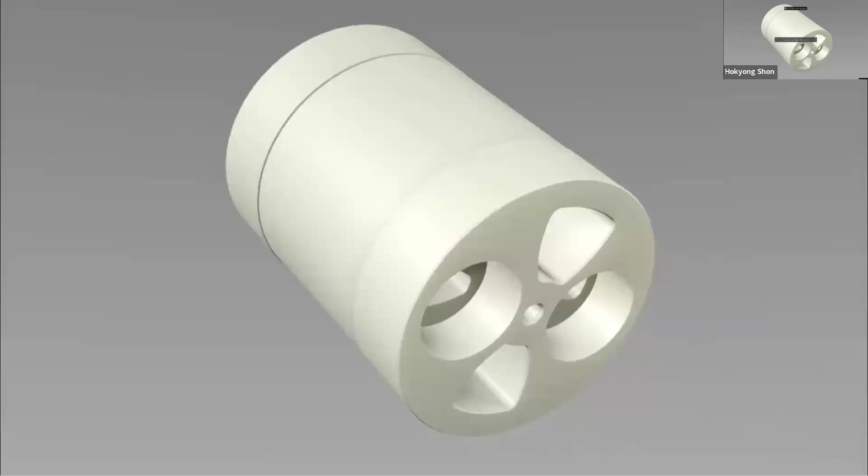Now let's explore the engineering behind this innovation. Simply yet elegantly designed, the PX high-pressure housing contains a ceramic rotor, the only moving part in the entire device. Surrounding the rotor are a sleeve and two end covers. These ceramic components fit snugly around the rotor to form a tight fluid seal. Water in the narrow gap around the rotor acts as a hydrodynamic bearing, requiring no external lubrication.

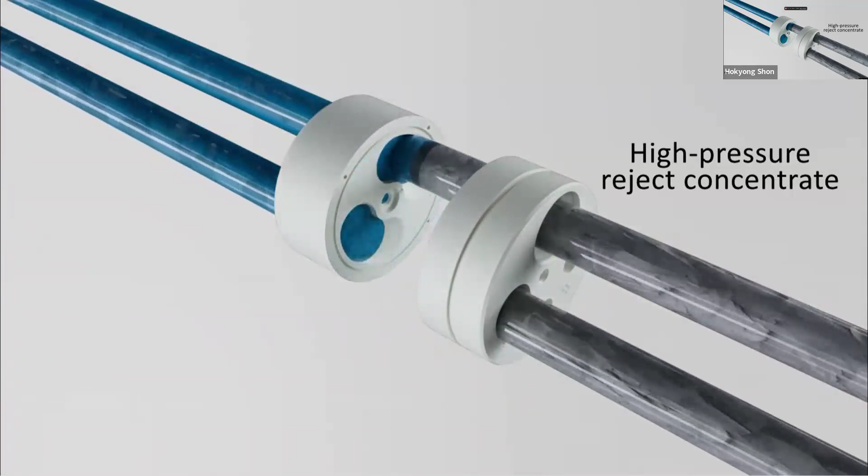High-pressure reject concentrate from a reverse osmosis plant's membranes flows into the PX. Low-pressure feed water simultaneously enters the PX and fills the rotor, where it is briefly exposed to the reject concentrate. Energy from the hydraulic pressure is then transferred directly from the concentrate to the feed water inside the rotor. This pressurized feed water now goes back into the system and joins the stream from the high-pressure pump. Any remaining concentrate exits the rotor at low pressure and is pushed out by feed water. The rotor ducts charge and discharge as the pressure transfer process repeats itself.

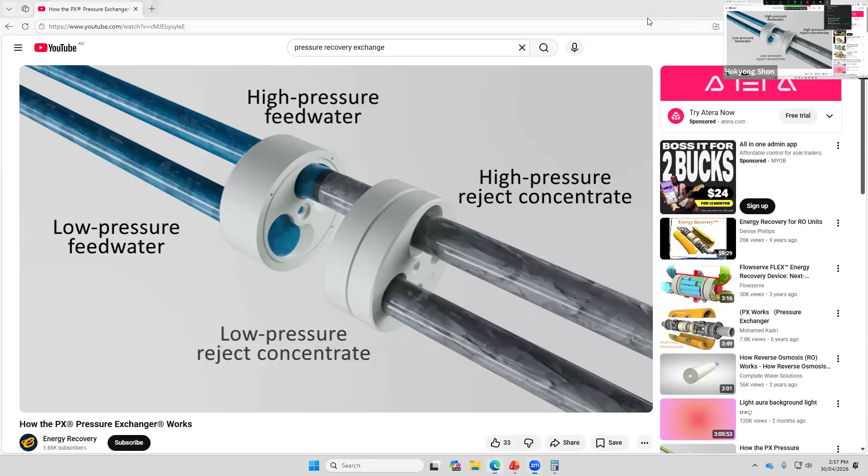So you can think about yourself also how to save the overall energy cost in desalination.

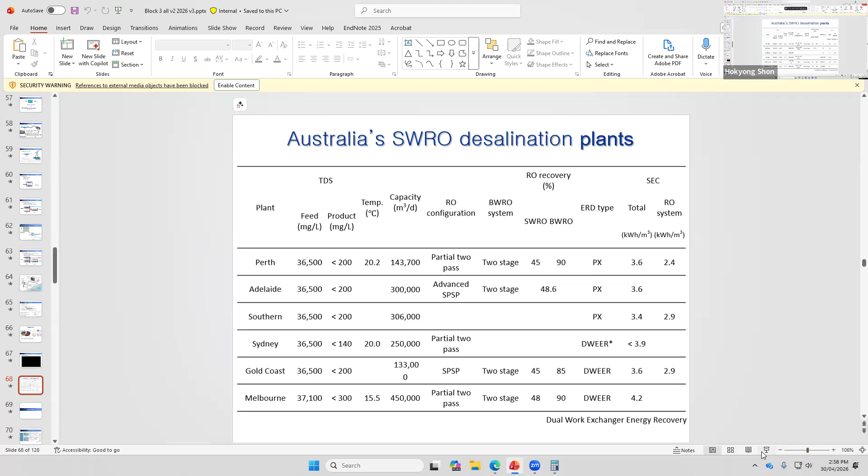So this is the Sydney desal plant information. You can refer to this to design your specific assignment 3 design.

Because the question is very simple: how many banks, how many trains, how many elements, how many pressure vessels, what's the rejection - show your wave software design, capture that.

This is the example of a real desalination plant in Australia. You can see the feed TDS, product TDS, temperature, capacity, RO configuration, partial two-pass, advanced split pass, SP split pass, then partial two-pass, and split pass, and they have a two stage.

Some of them did not mention 2 stage, 2.5 stage, or third stage to recover higher rate, and recovery 45%. This is the first pass. Second pass is BWRO, 90% recovery, with a different RO recovery.